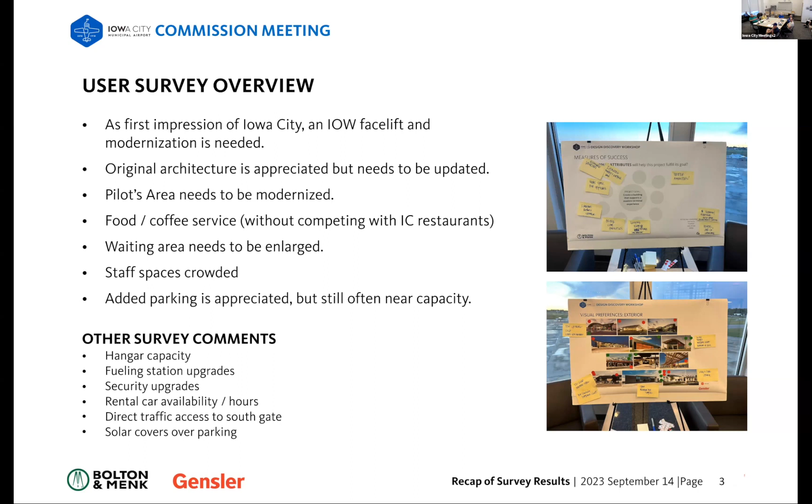For the structural overview, our structural engineers came and I talked to them - again no surprises, but a lot of findings would require fully in-depth work, digging down and taking concrete cores of the foundation. We didn't do any of that, but they did get up in ceilings and looked at beams, finding that if you're going to extend up on the existing structure, there would need to be some strengthening of the current ceiling and roof support. The walls could potentially carry the extra load in foundations, but that would require destructive testing - tearing stuff apart, digging down and exposing the foundations. So generally there were no major concerns, just a little corrosion in a few areas, but nothing structurally concerning. That's the real quick and dirty version, but if you want to see the full report, I know it's out there. I think I've seen it - did you send it to me? Anyway, if you haven't, I'll get it to you.

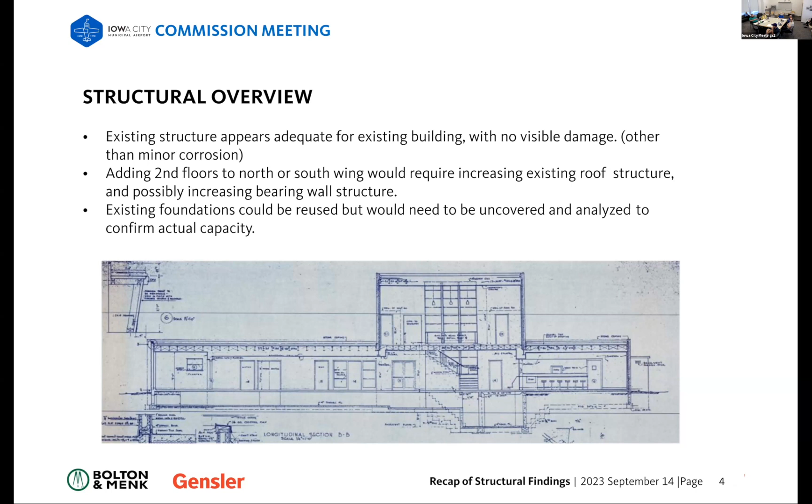I guess, Ryan, you're up now. All right, I'm here.

So we presented four different concepts during the public input process and came away with some feedback. Tonight I'm presenting an updated, refined concept for the Gateway and site circulation based on that feedback, plus some additional information gained.

The two main takeaways were: additional parking is very much wanted, which was the reason the image in the bottom left was selected. And when looking at these four boards, the other thing that came up was a preference for a revised planting approach along the driveway towards the terminal, showing just a double row of trees as the preferred landscape response.

So moving forward, we explored options that honored the existing landscape architecture design approach while expanding parking as much as possible. We can do the next slide.

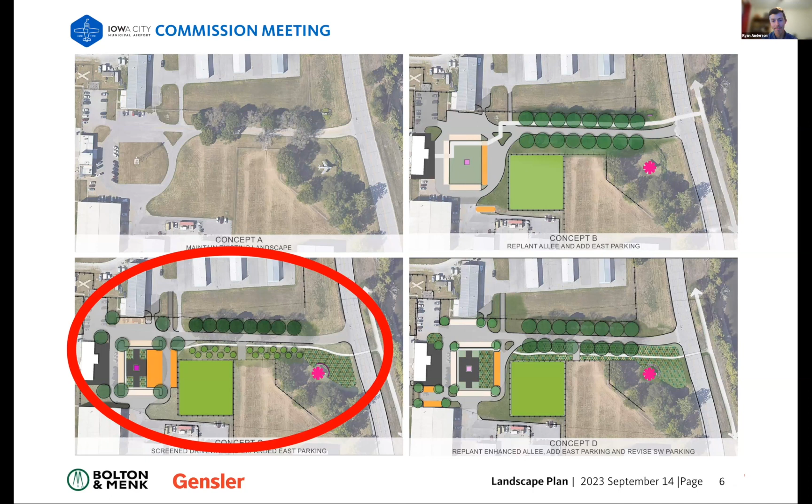A couple other images that got a positive sticker: the top left entry sign with colorful signage. One of the trends right now is lettering posted up on top of a sign to elevate it, and one benefit of that sign format is that you can fit a lot of letters along a longer sign, giving it more presence in the landscape, at least from a horizontal standpoint.

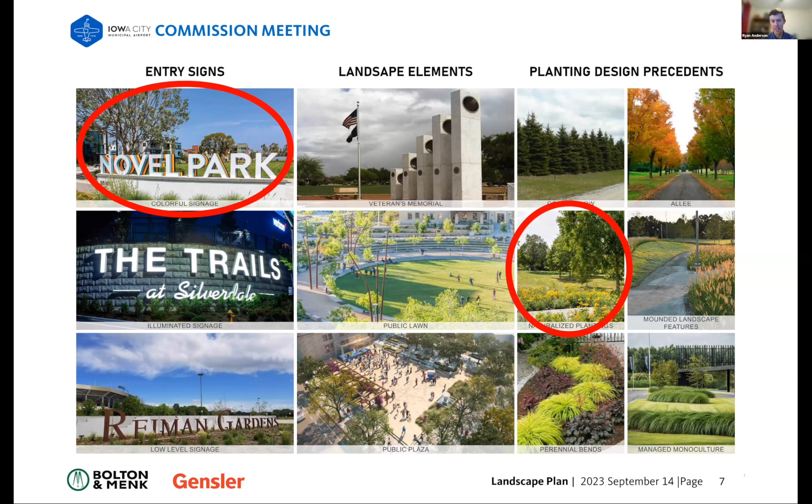And then on the right side, the naturalized planting approach also got a green dot. Moving on.

So what we heard essentially was that there was a need for more parking. We have the solar field planned to the east of the existing driveway or ring drive, and the question was whether there's a possibility to overlap those two programs, to allow solar to happen over the top of a parking structure so we could have more room for parking. We also heard that the naturalized planting approach—low maintenance, hardy plantings—was the way to go for plant beds.

The other circulation-related comment was to consider, as you're coming into the airport, a direct connection to the southern hangars. So as part of these concepts, we're exploring converting to a true two-way traffic pattern. Currently it's intended that you drive all the way towards the terminal, then make a hard left turn directly to the south, and then south through the gate to the hangars.

A lot of folks today are taking what feels like the first available left, not abiding by what's supposed to be a one-way traffic pattern. Walking the site, you can understand why, but as part of any of these designs, we're going to provide a more direct connection through a true two-way drive lane width.

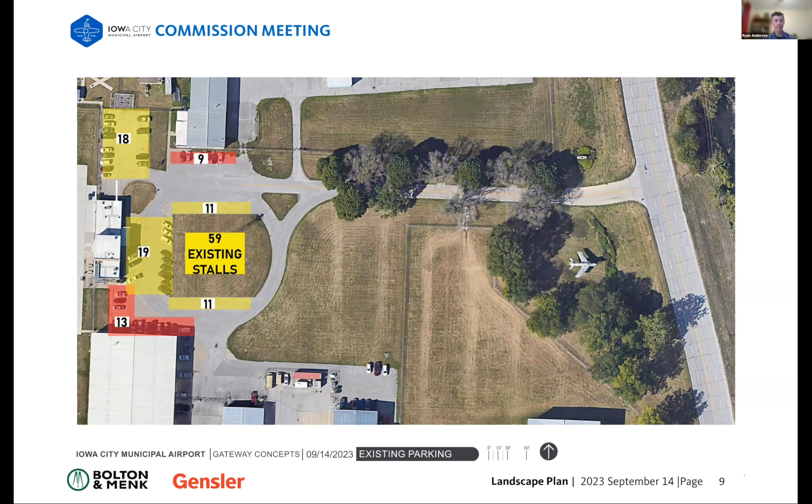So this is our approach at expanding parking. It's a lot more orange than before, essentially taking over the entire area to the east of the Ring Drive today for a maximized parking layout that still accommodates pedestrians, with sidewalks allowing people to navigate up towards the terminal. This also combines solar for covered parking in the two center bays, labeled with an H on the plan—going around and under the solar panels.

We were seeing the Universal Services building, where they've got the solar panels down there, right? Oh, okay, like elevated solar—shaded parking, really. Okay, now I understand it, I think. Yeah.

Ryan, out of curiosity, the layout that you have here, does that reduce the solar panel footprint? It does not, I'm glad you asked. I'll get to that in about 2 or 3 slides. We're stealing your thunder. It's all good.

I'll work right to left here, backing up to talk more globally. One of the things we've focused on in this study is how to increase the visibility of the airport driveway when everything is set back from the road. The memorial will be a great addition, but we also felt the actual signage itself could be beefed up in scale and presence.

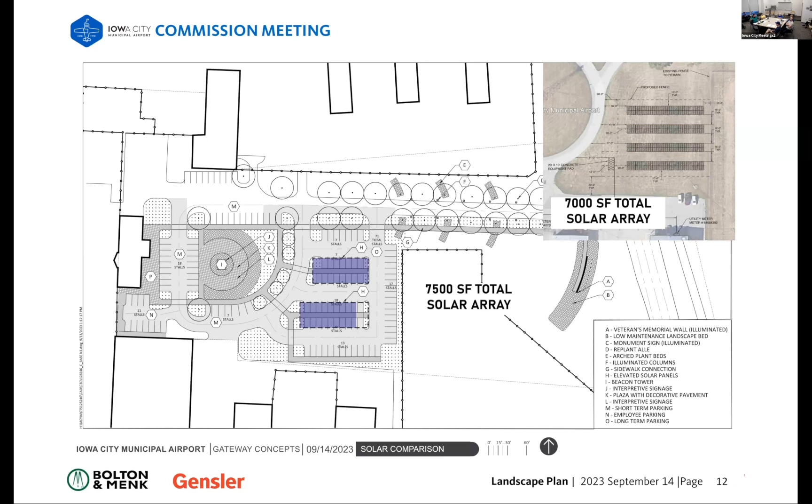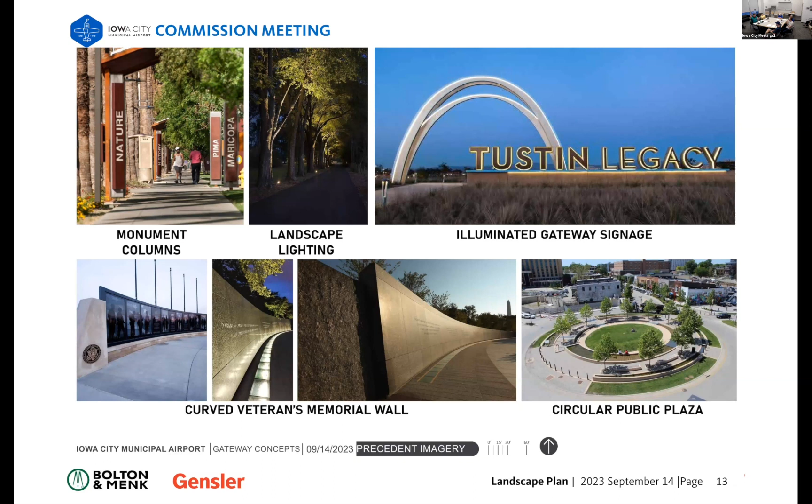But there were also issues about where the electrical boxes are. Yeah, with the space that Ryan's got in here, I do need to give these to CMP and be like, here's what we're thinking, does it still kind of work with the initial plan? So that does need to happen. However, my knowledge of how all of that works and the cabling, it really doesn't change dramatically much of what we have planned. It does kind of reconfigure the layout to some degree.

So there might be some cost issues, and also with the carport idea. There could be some cost issues, but I know CMP was looking at it, I just don't have that information. But if you have a platform for the parking lot, are they going to need to break ground so they can put the solar panels? Well, it also depends on how quickly, like Ryan said, all of that parking can be phased in as needed. We don't have to build that entire complex all at once.

So we could start essentially with the two areas that are going to be where the solar panels are. And then until then, what you have is more or less this similar traffic circle that you have now, out there, just widened to accommodate two-way traffic. And in the drawings, I think you don't have to put the airplane in it, because that's one of the things we're trying to get rid of.

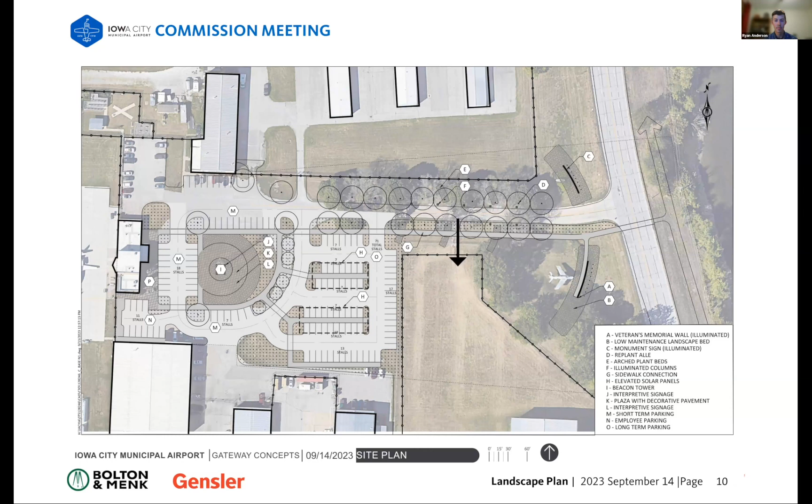So something closer to maybe 60% hardscape, 30% or 25% landscape, and 15% miscellaneous architectural site elements.

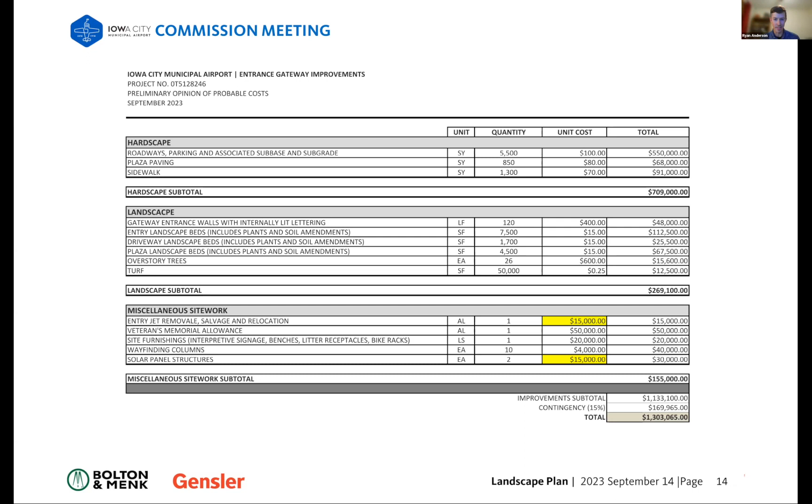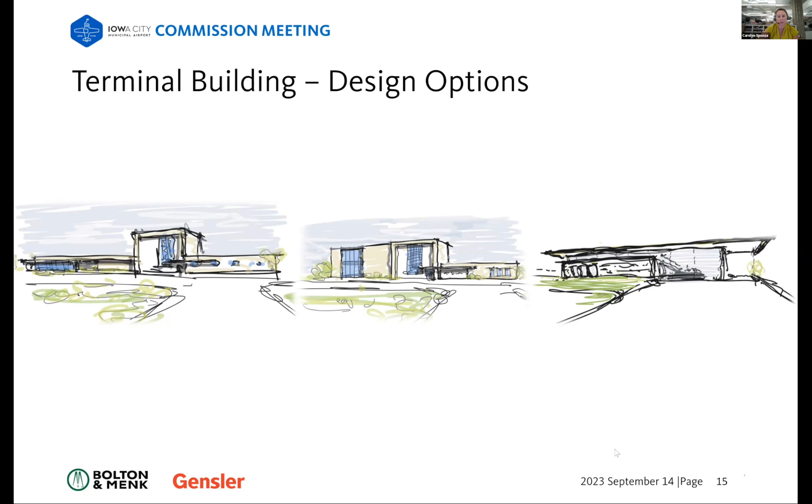Okay, so with that we're going to move into the building design options, starting with the program we discussed during the last meeting. We won't go through this in detail, but the high level takeaway is that a 1,800 to 2,000 gross square foot addition would be required to meet all the programmatic requirements identified during interviews and other sessions, resulting in an ultimate terminal that would be about 6,800 gross square feet. Again, that's if you're building a terminal from scratch - this is like a greenfield program. As we've developed the various options, we'll show how each compares to this program.

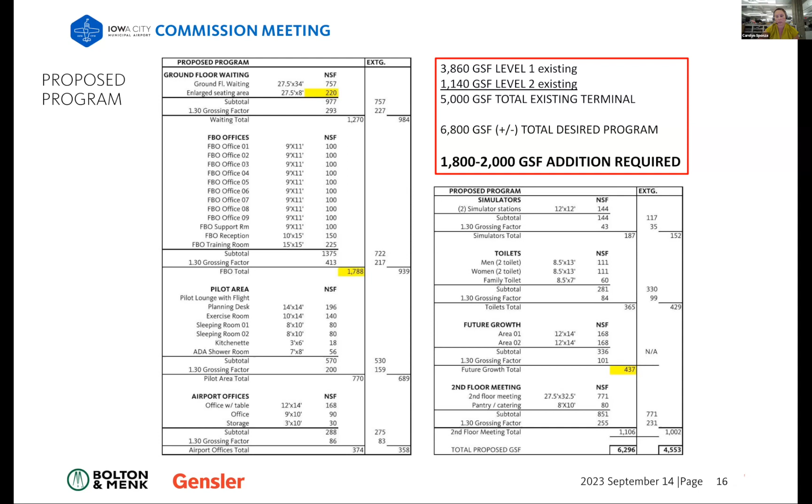So again, last time we met we had a number of different options. Option 1 is not shown here - that's the do-nothing option. Option 2 is the light touch renovation, which would not substantially add or change the building, but would make strategic upgrades to mechanical and electrical systems and building enclosure, and refresh finishes inside.

We also had 5 different sort of option 3, which was substantial renovation last time, and following our meeting we decided to develop 2 of those further: Option 3C, demolition of the south wing and design of a new 1-story structure south of the existing central portion of the building; and Option 3E, which retained a portion of the middle part of the building and added a 2-story addition to the south and a 1-story addition to the north. Then we had Option 4, which was a complete replacement terminal.

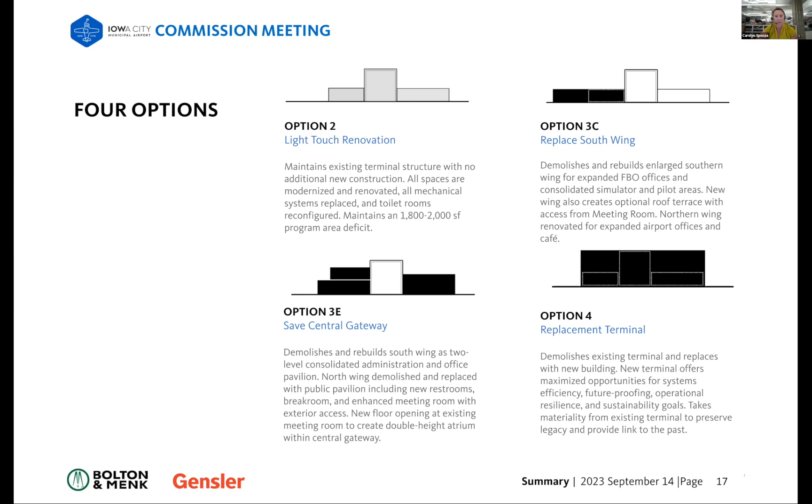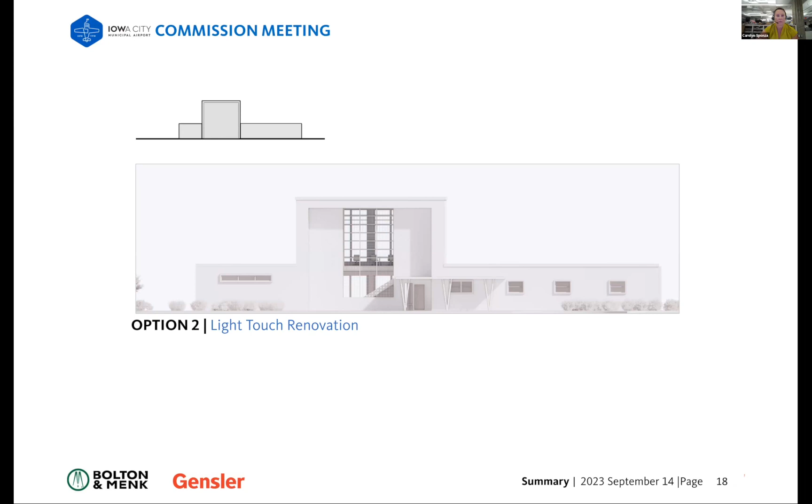So what we'll see for each of these is an elevation, some floor plans, and a perspective view. The first option we'll talk about is the light touch renovation, and you might think this looks a lot like the existing terminal because it is the exact facade of the existing terminal - just meant to say all the changes will substantially leave the structure appearing as it does today. I'm going to move this over to the side here.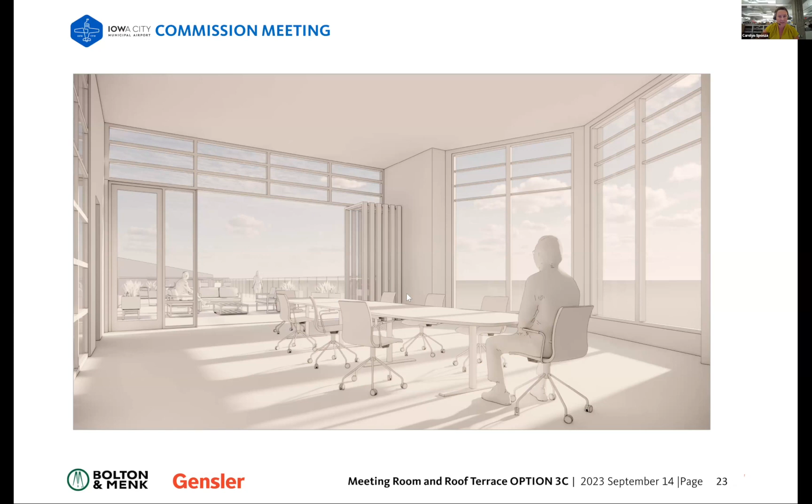Okay, good. We'll keep going.

So the next option, 3E, is basically saving the central portion of the building and doing a 2-story addition on the south side and a 1-story addition on the north side.

This is not exactly saving the entire central portion of the building, and when we get into the plans, you'll see why. At the community meeting, somebody said, wouldn't it be great if we could just save the first 5 feet of the building?

This doesn't quite do that, but it really rethinks what's happening in the middle of the building today. I also wanted to point out that this new piece on the north side is higher in scale because one of the things we've done here is move the meeting space to the first floor.

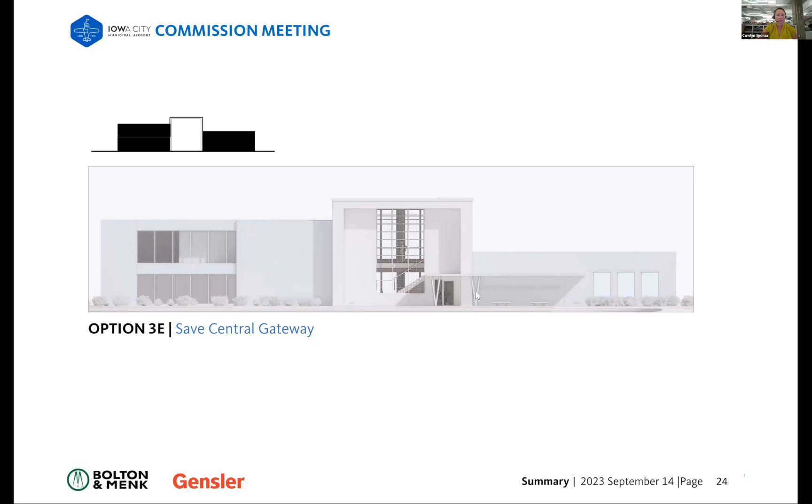To have a larger, more generous meeting space, we wanted a space that had a little extra height. We thought that was kind of a nice feature to change the proportions of this a little bit.

So this plan is a little bit different than the previous one. Walking through the sequence of entry, the entry would still remain the same. The waiting lounge would remain the same, but in the new addition to the north, we would have a much expanded waiting area, new men's and women's restrooms, and a larger meeting room.

The meeting room would be accessed off of the first floor. To the south, in the 2-story addition, would be the FBO, and this probably has the ideal relationship to the waiting lounge so that reception could be there to respond to people coming in and out of the building.

On the upper level, going upstairs, you'll notice we're proposing removing the floor in the meeting room. So right now everybody is sitting on air in this scheme, and just extending a bridge to connect the existing stair over to the new 2-story addition, which will have the pilot area, airport offices, the simulator, and some storage and mechanical space.

What this looks like in perspective view is much the same in terms of the material palette and attention to detail as the last option. This 2-story piece has large expanses of brick.

We would maybe find a way to integrate a more modern interpretation of glazing in the areas that need it. And this structure in many ways also reads very similar to the piece that's there today, it just has different proportions.

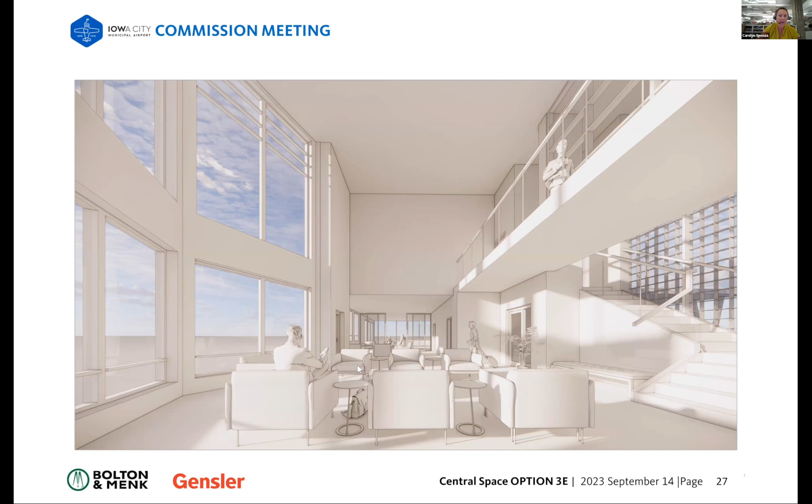The design team also had the thought to basically make a permeable glass or folding door that went between the expanded waiting room and the meeting room, thinking that if you had events, this could act as a pre-function space for people to gather before going into the meeting room.

Okay, did you have a question? No. Okay, I was simply facetious comments. Please carry on.

Okay, and option 4 is the replacement terminal. So this is all new, right?

I think some of the things that we heard both from you and from the community session was, if we do something new, it should have some of the style and vibe as the existing building, and obviously many of the civic structures in town have that same character because of the architect who designed them. So this proposes a bit of a different approach to things.

But it picks up on some of the same thoughts. There's a very predominant horizontal line in this elevation. We're using sections of glazing and solid sections, picking up the idea of using thin columns as supports for an extended roof structure.

So obviously we had the most leeway with this one. The idea here is that there's two halves of the building: the public half with the waiting lounge and the lobby.

There's the private half of the building that has the FBO and the pilot area. And then we thought there could be an elevated meeting room on the second floor that could act as an extension of this public space.

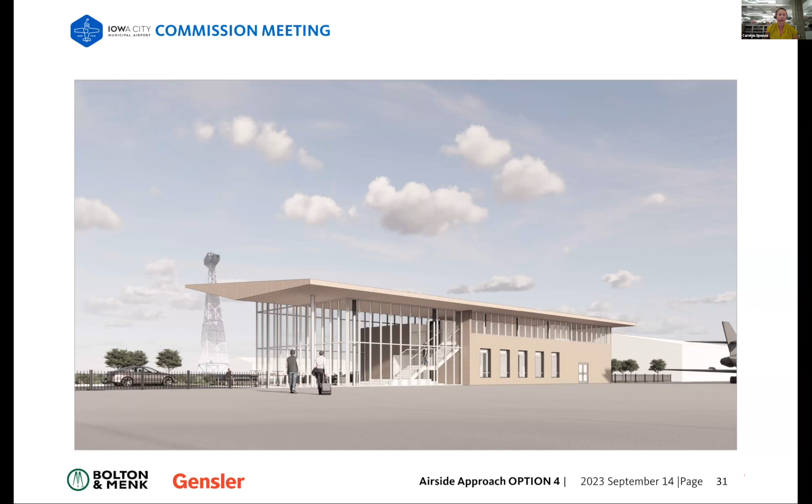And to address the idea that this building is a gateway not just from the city to the airfield, but for pilots and others arriving on the air side, we wanted to do a schematic rendering of what it could look like for people arriving to the airport. Again, some of the same features would be evident to visiting pilots: that great 2-story space, the approach of the roof, and the more solid portion of the building facing the airfield.

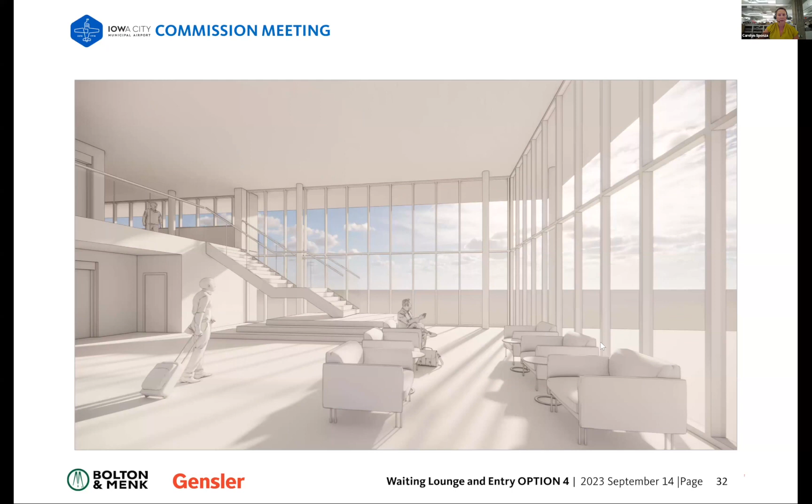This is a snippet of that waiting area and the effect this could have with the larger volume. We could do a very stylish Mad Men type stair connecting the first and second levels, becoming more of a structural feature element to the space.

And then we started thinking about how this great glazed space could be illuminated at night, starting to really act as a beacon for those visiting in the evening hours.

So with that, I do have some preliminary costs, but before going to that sheet, I just wanted to address any questions about the design elements.

I'm sorry, it looks like a zoo cage to me. I don't like that whole one end of it being all that glass and that funny stairs going up. It just... I don't know, it just doesn't.

Well, I do like it. I think it's pretty cool myself. Yeah, absolutely.

My one comment is that we need that same thing, either with wholesale replacement or renewed with the existing structure. We need to have that lettering on both sides. We want to welcome them to the Iowa City Airport and let them know they landed at the right place from the air side. Because I think we don't have signage on it.

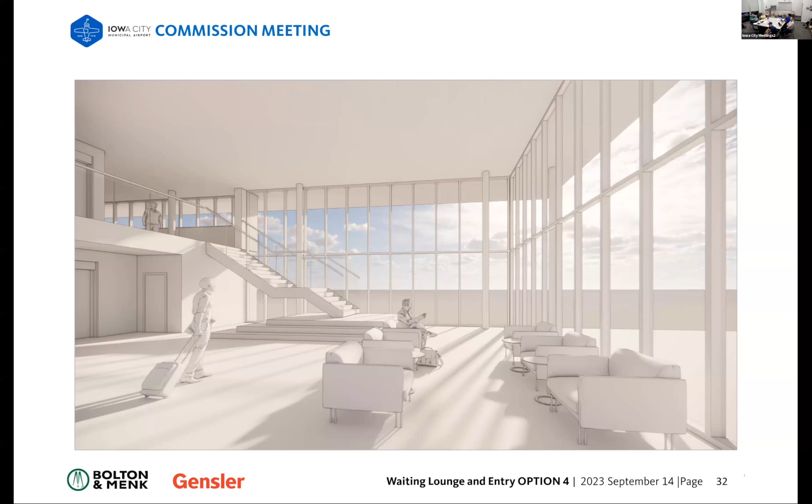So I like what this looked like. I didn't see that little balcony on the plan view. That's the gallery area. I like that quite a bit - could have some tables, some chairs there.

I have a friend who's an interior designer, and I'd be remiss if I didn't use the word timeless - I hate that I'm using it, but it has a modern aesthetic that looks like it would age well. It also looks like an airplane wing, which feels appropriate for an airport. I like it a lot.

In detail, things like door locations, restrooms, where the showers are - that can all be sorted out later in design. Yeah, this is like a super concept idea of what it would look like. If this goes into a design phase, you'd do many different variations of the elevation, the roof, and all the plans.

Have you thought about energy efficiency? I know that's been some people's concern with a large amount of glass. Yeah, so with the glass it would definitely be a double pane, an insulated glass unit, and we'd select a film or tinting on the glass itself so it was energy efficient.

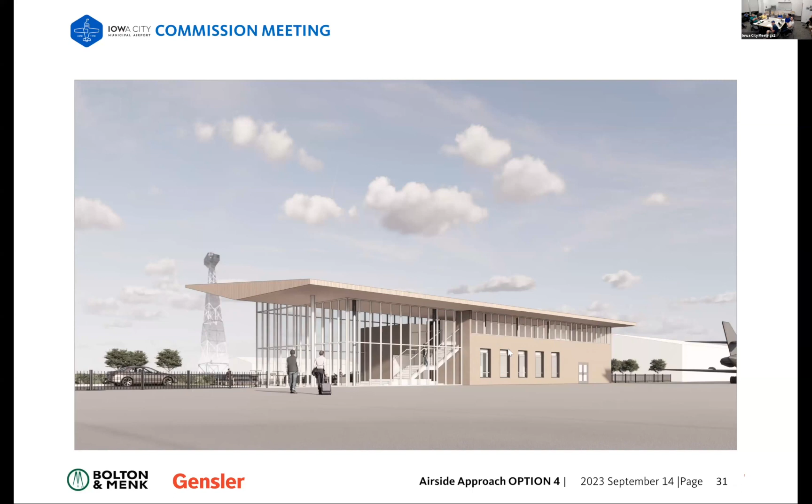Would there be any light control for glaring sunlight on the east and west exposures at certain times of day? I have some concerns about that. If it's just plain glass, we need some kind of shades.

The other windows were tinted, no? Yeah, you can reflectorize or tint to minimize heat gain or hold things in, and have shades that control the light coming in and out - it can even be automatic. The overhang can certainly be constructed to minimize heat gain in the summer and maximize heat gain in the winter, so it could be a net plus, at least in the wintertime.

Instead of having the stairs go down from the top down to the middle, it seems like you're losing all this waiting area space. Have it go down differently - that could be a detail sorted out later, and you could reduce the amount of that huge cage.

This evokes images of European airport terminals that are light years ahead of anything it feels like we're building in the US. I'm getting a lot of callbacks to the current building, but it also puts a weird twist on it. You just came from there - I think it basically welcomes you to a real modern dynamic city.

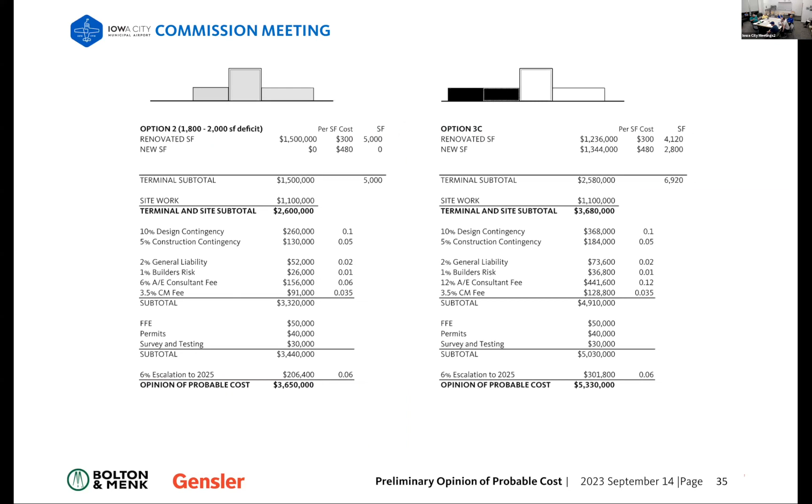Say that again? Like all the details, we don't have to know any of that till we've already got... No, we don't need to know the details, but how the team's got it laid out in terms of, we expect this area to be FBO. Think about the walkthrough type stuff, like you're a pilot, you walk into the building, the new building had the reception area called out.

3E isn't much different in terms of the space. You walk into the lounge, the FBO's right there. Presumably we're going to build out a reception desk on that wall that is the lounge. So we've got that. I don't know that there's a whole lot in those layouts that I would change. No, what was the new building layout?

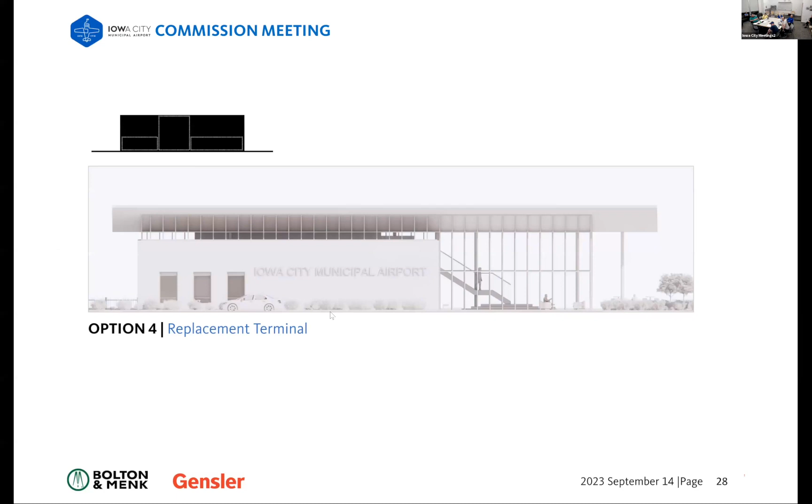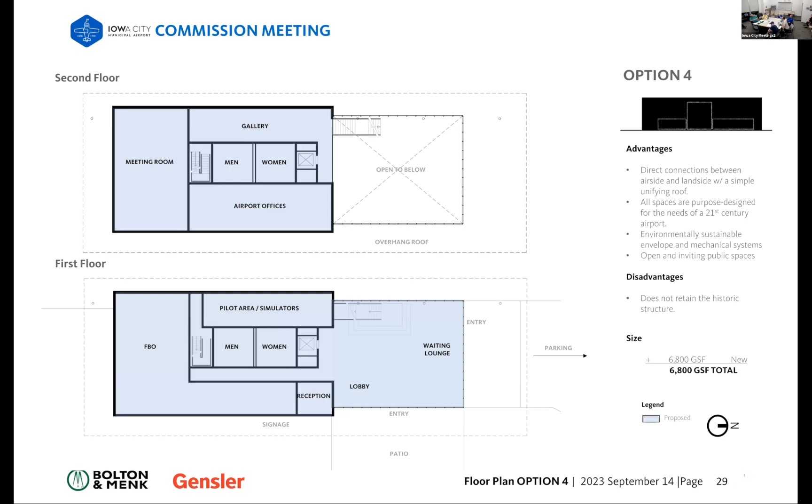If you set down the path of 3E or something like that, got the design and architecture and stuff approved, got the money to do that part of it, and then when you show up for the actual bid, you've determined that that's not going to be feasible because you start tearing apart two sides of a 50-year-old building or whatever it is—can, at what point in time do you reach a point of no return where now we just lost our opportunity, or is there that?

I guess to what level does that have to be decided tonight, that you're going to go down? Because you're basically doing 90% demolition and rebuild with option 3C versus 100%. I would say.

I mean, because a lot of it, the whole point of designing the next step is that's where we're going. So probably the decision we make tonight, and until we get a little bit deeper in the environmental phase of it, because I think that's probably going to come first to some degree. The environmental should be roughly the same for both. I can't say that, because we leave part of the original building. If we're leaving part of it, then we look at, say, the asbestos issue, and there would be different historical aspects than if we go from 3 to 4. There'll be some differences, but that's something we'll have to work out on the scope of what's required.

With the environment, is there a chance? Oh, it was the first thing I thought. I mean, there would be a point of no return, I just don't know what that is. Sure, that's fine.

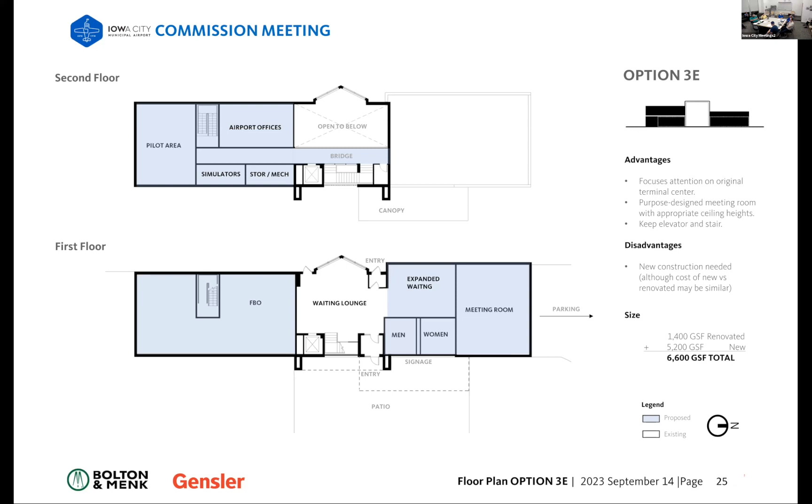Okay, I can change the floor. Yeah, I can change the floor. So the problem of the, my vote would be for 4. Like, I don't need to sleep on it. Okay, I can change the floor. Brian? Sure, you would. No, you get to have a different opinion. Yes, it doesn't have to be a unanimous decision. I mean, I understand it's a lot cleaner and... Yeah, if we get the money for it, yeah.

It's unanimous. And it says it does not retain the historic structure. I was hell bent before we came into this that I wanted to keep something of it. I think that option 4 actually feels like it—it feels like this building. Motion to approve option 4.